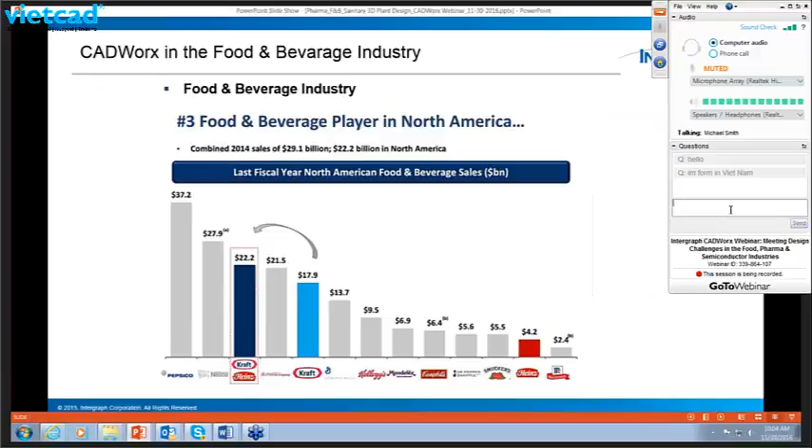But any of the companies that service them are looking for performance advantages. And that's really the message today, is that CADWorx is a performance advantage for any of the consumers of our software and using it in these industries to perform plant design. North American beverage companies, Kraft, some of the others, Nestle, PepsiCo, just some additional graphics to represent their revenues.

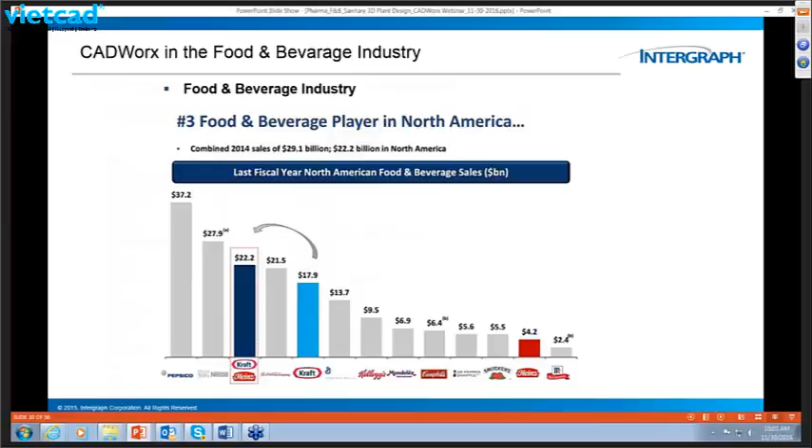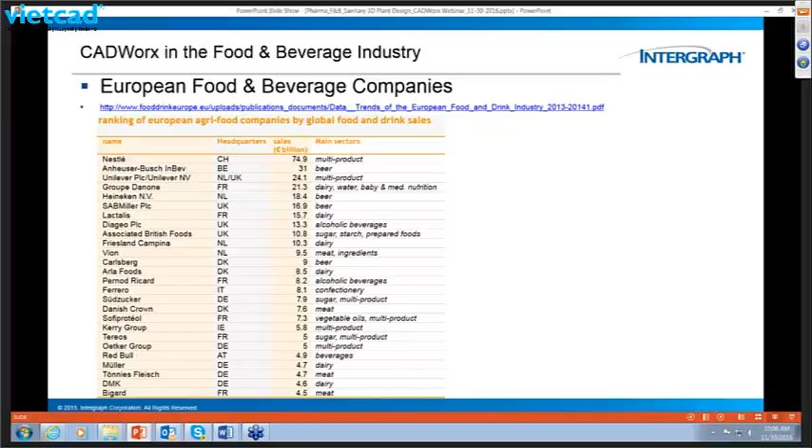Over in Europe, we have a similar scenario. Here again, look at Nestle at the top. Anheuser-Busch. And so this is just for our colleagues in Europe that might be viewing to see that, in the food and beverage industry, we have various companies that are leading in various markets, such as multiple products or beer, dairy, any number of other categories of food and beverage within that industry. Some percentage in terms of increased exports. Same thing for Europe. There's a pretty sizable increase in any one category based upon this kind of data here.

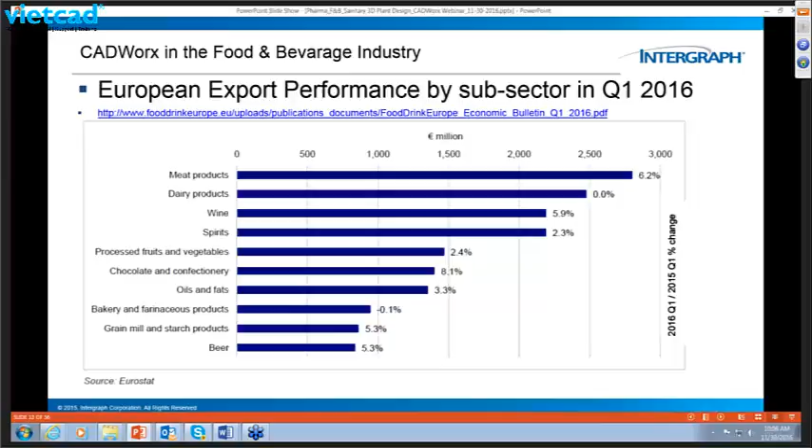With that said, that same plant, the Nestle's brand ice cream plant, is the world's largest ice cream plant. And in that regard, for the dairy industry, it's quite a success story. And one of our clients, the Dennis Group, has been involved with this client for some time. And we thank the Dennis Group for their success and performance with our software since the early days of adopting the sanitary specification.

Another success is with Briggs of Burton in Staffordshire, UK, where they utilize CADWorx for the food and beverage, pharmaceutical, and health and beauty market as well. And as you can see by this quote, they leverage the database, which results in cost savings from fixed prices with their suppliers because they were able to maximize the discounts by ordering in bulk based upon the model. So some really good performance there.

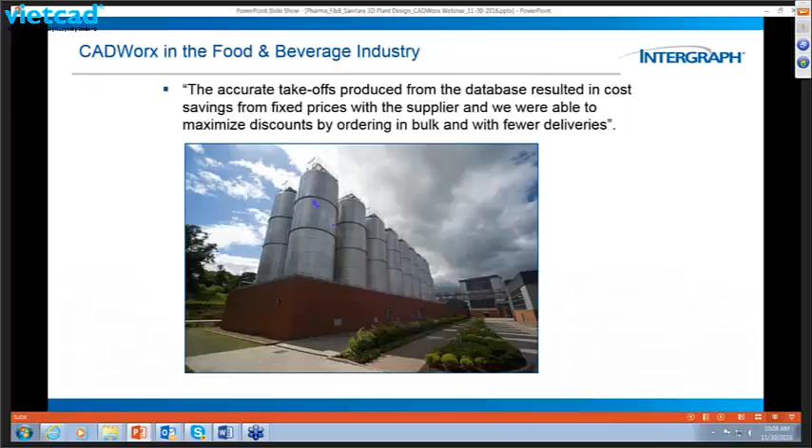Here's another example in the wine industry in California where CADWorx is utilized to develop their 3D models for wineries, and that application of sanitary piping as well.

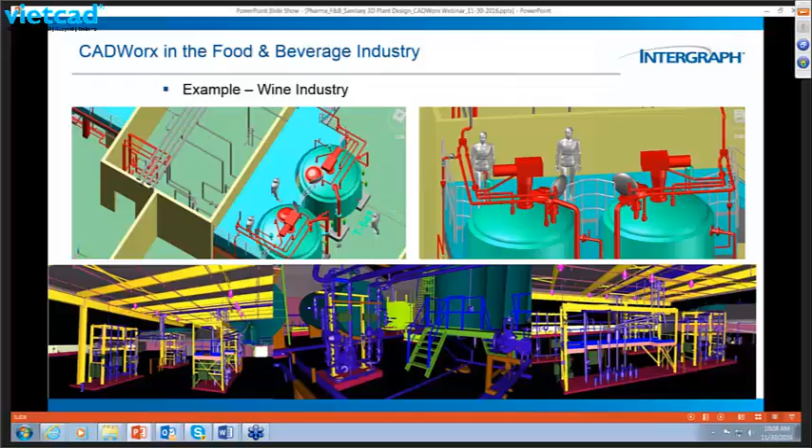So moving on to the pharmaceutical industry as an example, the global pharmaceutical market is worth some $300 billion a year, a figure expected to rise to $400 billion within 3 years. And the 10 largest drug companies control over 1/3 of that market, several with sales over $10 billion a year and profits in the 30% range. But if we look at revenues in this graphic, we see that it's a very lucrative industry, obviously.

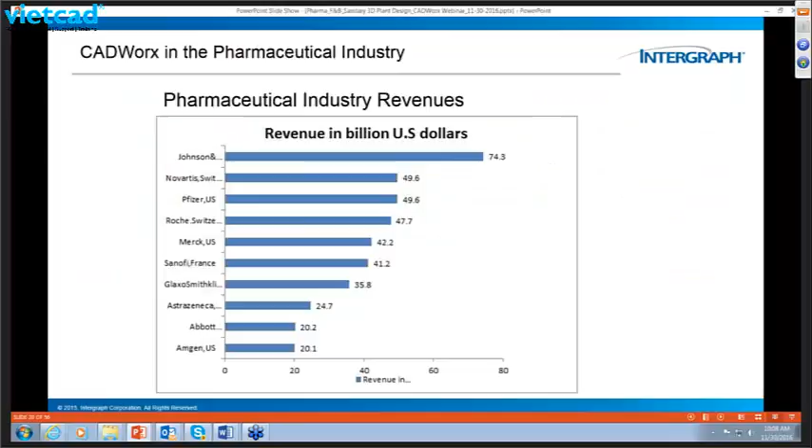So it's a very lucrative, active industry, and I think we all would agree that we have to eat, we need medicine, we have to drink water. So these alternative industries are growing and will continue to grow over time. So they're very prominent and lucrative industries to be involved with.

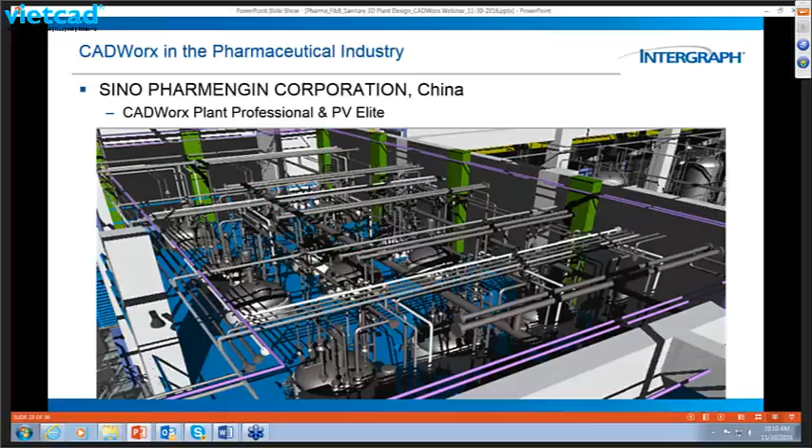Here's an example of CADWorx at work in a pharmaceutical project in China. As you can see, CADWorx was used for the piping and vessels. PV Elite was also involved there as well, and we see some examples of that. So there are some examples of some really great projects. But here again, notice that everything is contained within some kind of building structure.

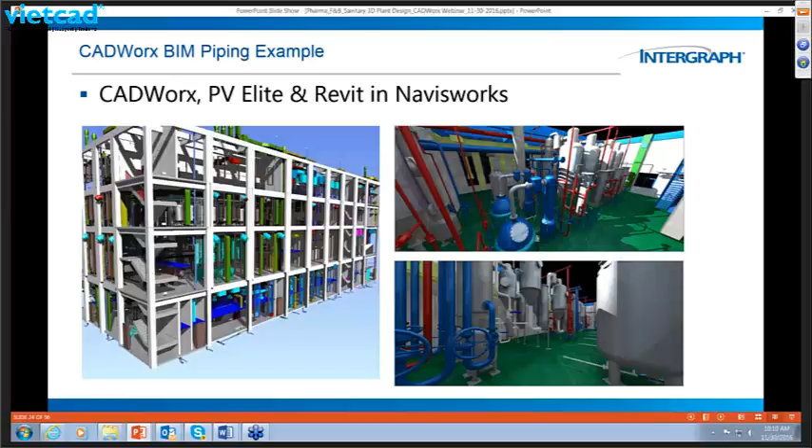Moving on to actually talk about the sanitary plant specification. As we all know, it involves stainless steel tubing and some very unique multi-port valves, as we see here in this image. Know that we understand that the pharmaceutical and food and beverage industries have unique stainless steel piping systems, valves, and vessel requirements, and we deliver software tools to address your industry needs. As we see here, a very unique valve matrix, lots of clamped fittings, and unique vessel representations.

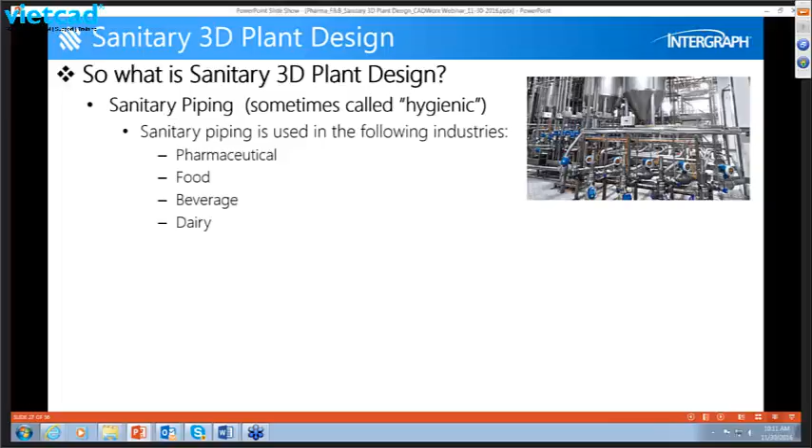As we know, sanitary piping is really utilized in the pharmaceutical, food, beverage, and dairy industries. And as you can see there on the right, a very unique stainless steel environment, very clean environment. Why is that? Well, we have clamped connections which are designed to allow piping systems to be installed easily and then disconnected quickly to modify piping systems between production runs.

Going down the checklist, all process piping and clean in place, or CIP, piping in plants consist of sanitary stainless steel fittings, valves, and pumps, as you see there on the right. Sanitary fittings are polished stainless steel tubing fittings that have to meet certain industry regulations, such as in the case of the U.S., where we have the USDA and the FDA regulations that must be met.

Obviously, there can be no cracks or crevices on surfaces, including the gaskets, that could hold bacteria. We're supporting the 304 and 316L stainless steel, which is required for cleanliness, hence the hygienic reasons. And we support the butt weld and clamp type fittings as well.

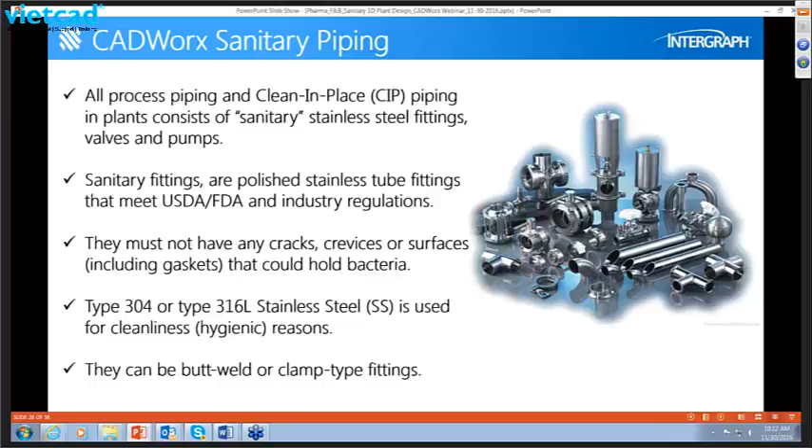A little history. In this case, Jim Lynn was one of the original authors that worked with us to develop a sanitary spec. So I pay some credit to Jim for having helped us. And that history involved Jim looking for something in the sanitary industry back in the late 1990s.

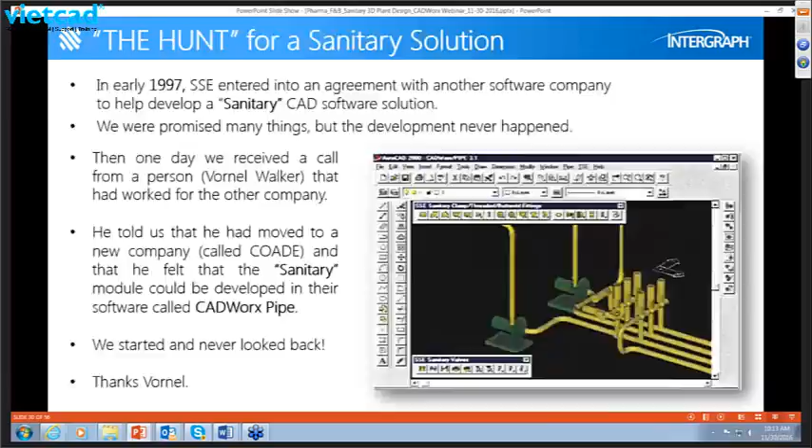And Vornel Walker, who knew him, played a key role in having Jim team up with what we were then called COADE to help develop the sanitary spec. By 1998, that spec had been developed and was working in an AutoCAD environment and supporting the migration from 2D drafting, 2D design to 3D modeling.

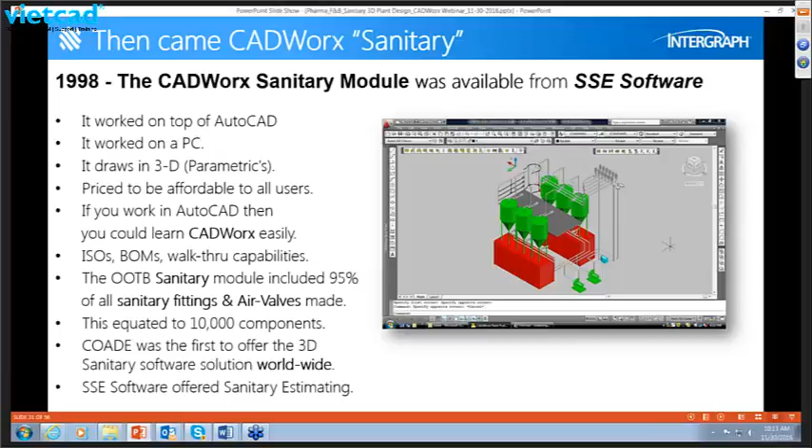So in this case, Intergraph, CADWorx and Analysis Solutions, had led the way some 18 years ago to move forward with the sanitary specification in support of the pharmaceutical and food and beverage industry. With that said, I teamed up with Jim again in 2014 to move that legacy sanitary spec forward, update it, and make it work within our current software capabilities. And that's really what we're here to talk about today.

And with that said, that was published as a content pack for our existing customers and for those of you who may be looking at CADWorx and considering it for your applications of sanitary plant design. We had a content pack published in February of this year.

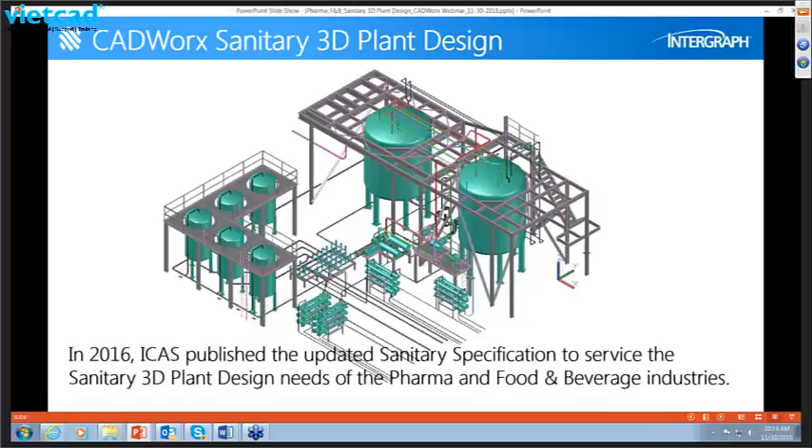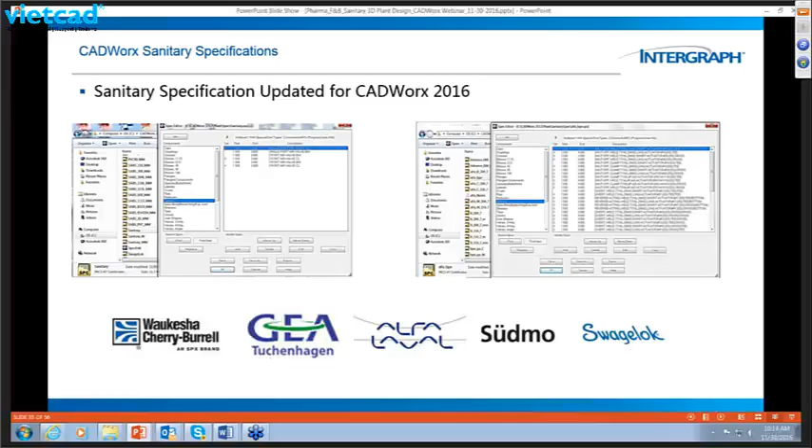Now, that sanitary spec involved migrating a lot of historic data forward into our current software and evaluating various manufacturers of multi-port valves such as Waukesha, Tuchenhagen, Alfa Laval, Sudmo, Swagelok, and currently I am in discussions with ITT. And that specification, when we look at it in the spec editor, as you can see, it contains the necessary long description information to provide you accurate deliverables and bill of materials for purchase purposes or constructability.

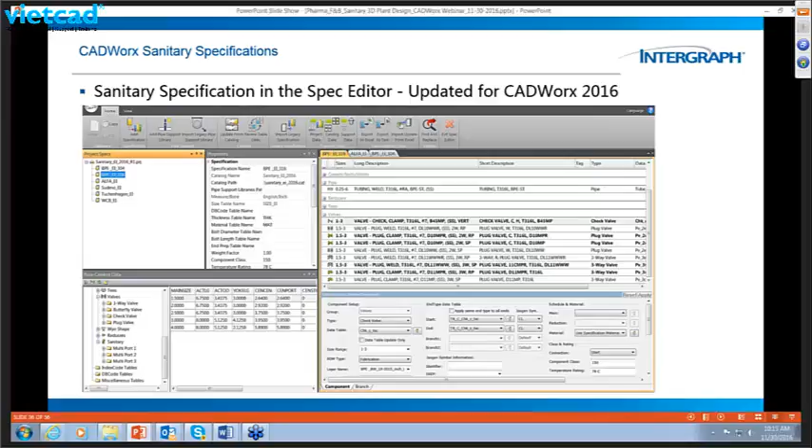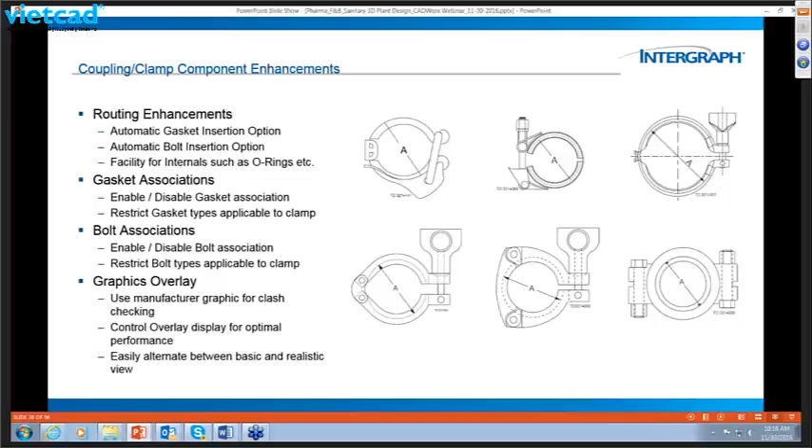And then we have a piping rule that allows you to turn on and off a very accurate 3D representation of the clamped condition, which allows you to control when and if you see this representation, and then this will be shown to assist you in clash detection value as well. The same thing is true with some other clamped conditions.

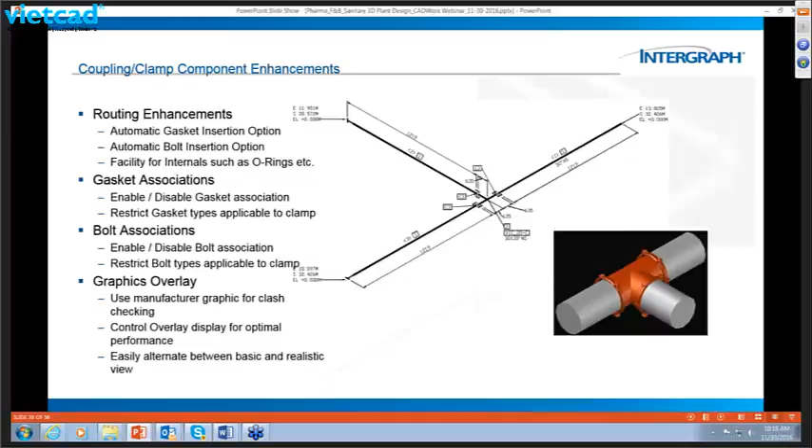In this case, in the Victaulic representation, we have a very accurate representation for grooved piping as well, and here you see an example of the ISO representation for that condition. And then another representation of the triclover or clamped conditions, whatever it may be. The ISOGEN SKEY is representing the appropriate coupling, and if it's a ferrule connection, then the ferrule is also showing up as well.

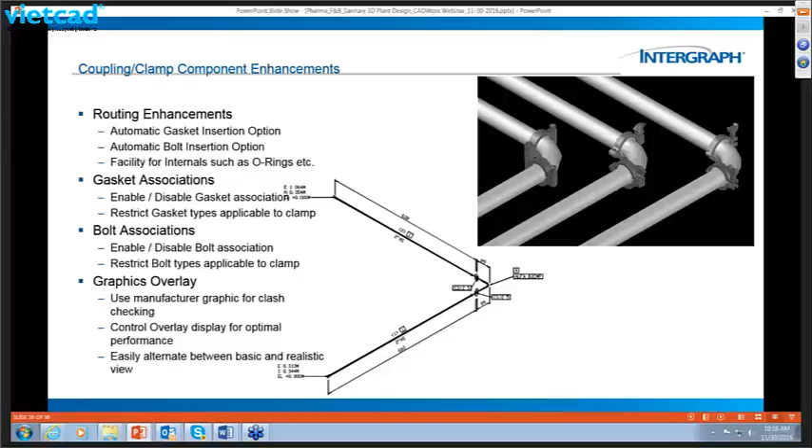So we've moved forward with an improved or enhanced capability clean across the board for these clamped and coupled conditions. And as you can see, the multi-port valves also support all of that representation, which then allows you to, like any other valve, pick on the valve, the plus sign, and begin to auto-route BPE tubing right from the valves.

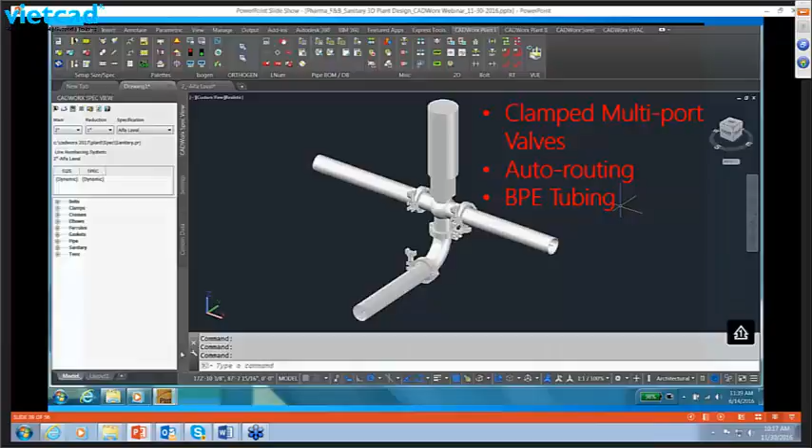Right, so now what I'd like to do is actually show a very brief video, just so you can see this in action, but then we'll go to a live demo in the software that follows. But just to give you a very quick look at how we are auto-routing just like any other CADWorx components. But in this case, it is the sanitary specification, and all of the components are available in the right-click mode as you're accustomed to with the CADWorx products that we sell to the oil and gas industry. We're very excited to share with you today that all of this is working fine for the sanitary spec.

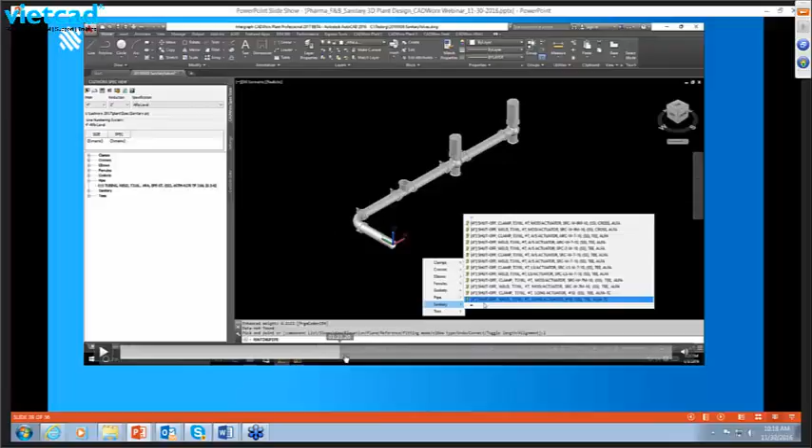And so I'll just progress along. As you can see, we're easily auto-routing with a very productive, intuitive workflow with the spec as it is. I'll move forward in the video to show you again that all of this information is available through the CADWorx component edit dialog. But now let's go to the ISO so you can see that. And we'll see this again live here in just a few minutes when we go to a demo. And so we'll generate some ISOs and take a look at that result.

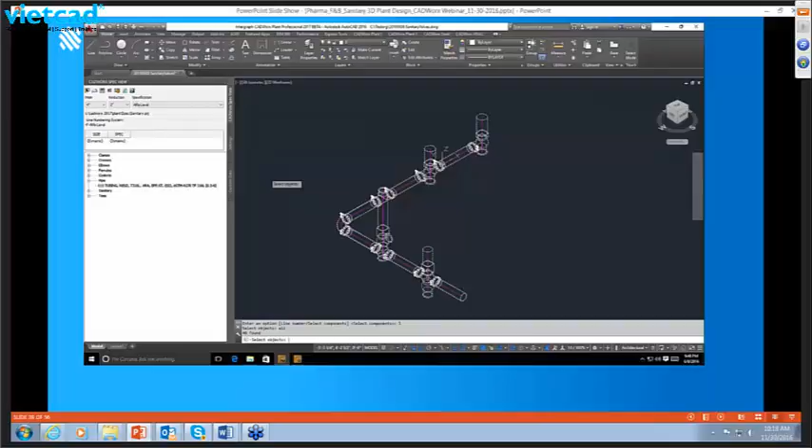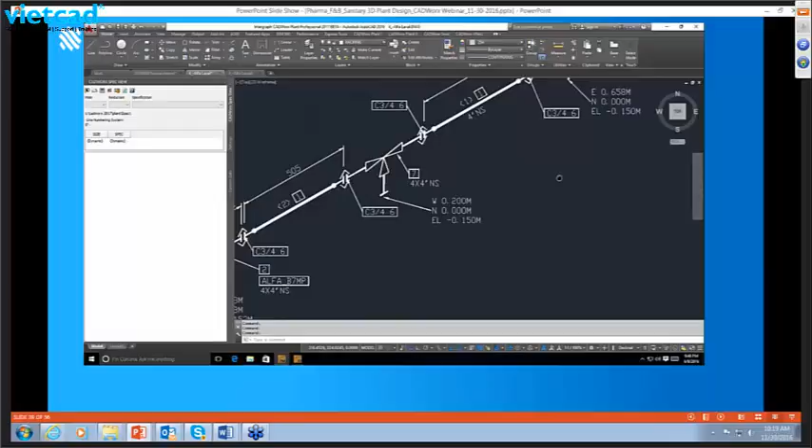Some of these bill of materials spill onto the second page, but now we look at the representation of the multi-port valves, the ferrules, the clamps, all the information that is clearly represented in the ISO now. And of course, the associated bill of material information is called out quite clearly. As you can see, the tri-clamp with the wing nut and the ferrule, etc. All right, so with that said, I'll move on to the next screen, and obviously the clamped and ferrule condition is well represented as we now show here again.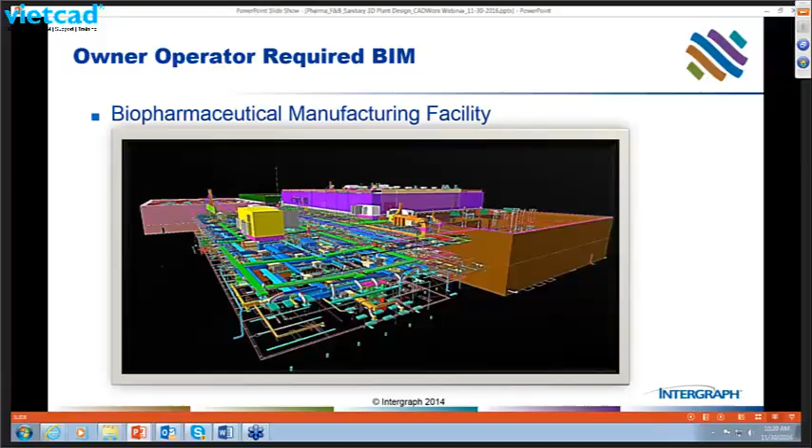Right, so here's another example of what I was talking about earlier, is that obviously this is a plant inside of a building. So this is a representation of a pharmaceutical plant where the owner required BIM, or Building Information Modeling. And this is a good segue to talk about our recent updates to the CADWorx Design Review 2017 software, where we have a new export capability to meet BIM standards and deliverable requirements in those projects. That being that we can create an IFC file. I'll explain that in the next slide.

But this enables you a new level of deliverables, enabling you to comply with project requirements, satisfy owner requirements for BIM implementation. This improves your collaboration with other stakeholders by sharing the data. It passes data-rich content, and that in turn serves downstream needs of facilities, operations, and maintenance.

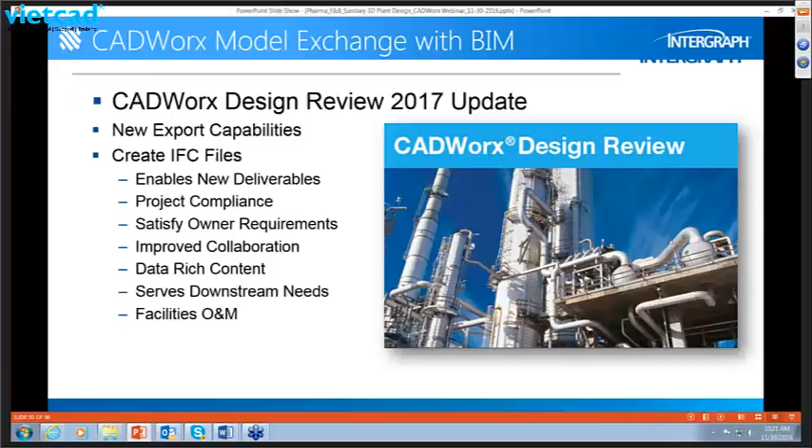What we are talking about is the fact that most of these projects have some kind of architectural software creating the 3D building. That might be Revit, that might be Graphisoft ArchiCAD, or some other product. But the whole requirement for interoperability is paramount in meeting BIM standards, and those BIM data exchange standards require a specific data exchange format, that being an IFC file.

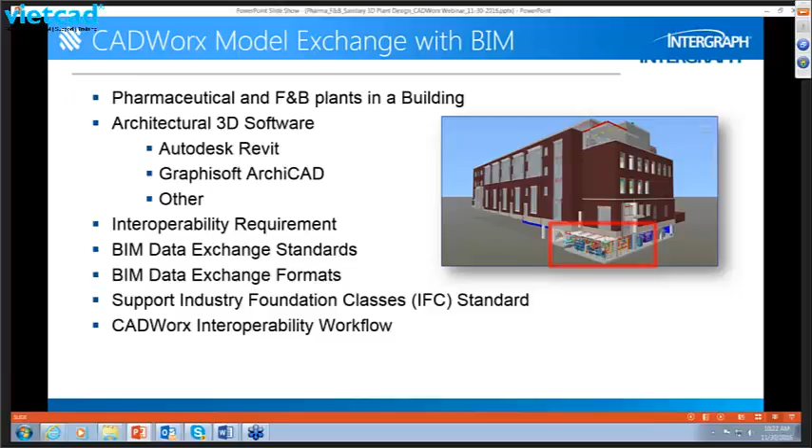That standard for Industry Foundation Classes is something we're very excited to share with you that is new in CADWorx Design Review and enables you to meet those BIM deliverables of IFC files and exchange your data with other stakeholders such as Revit users. So what does that interoperability workflow look like? It's very straightforward. Take your CADWorx 3D piping model, open it up in CADWorx Design Review, and export the necessary IFC file. That in turn can be read by Revit.

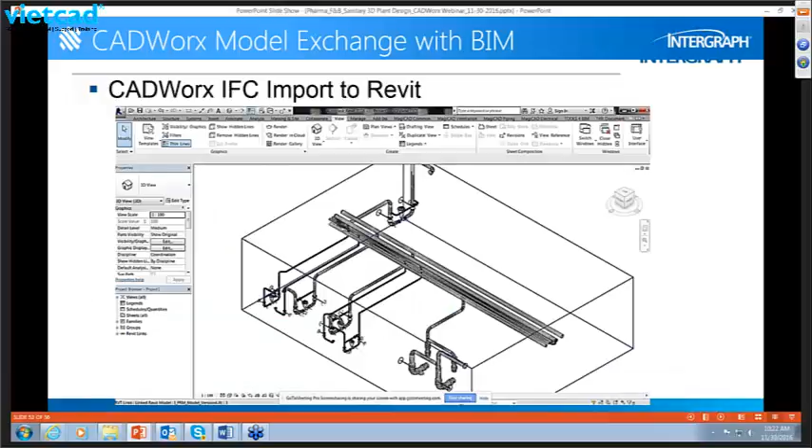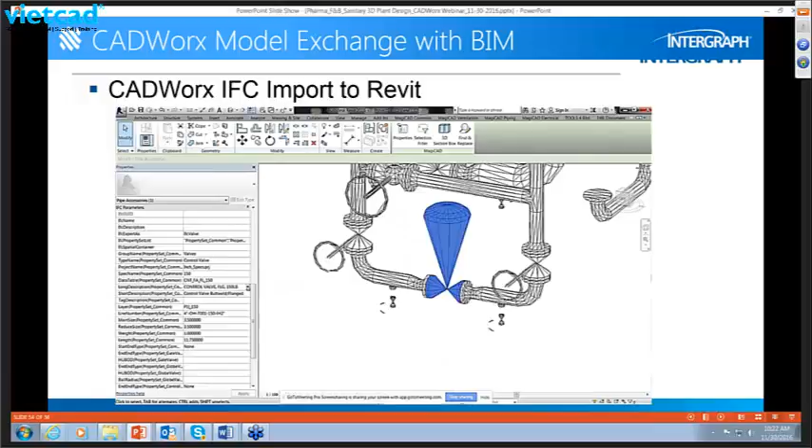An import of the IFC file brings the CADWorx 3D piping model directly into a Revit building. And in turn, the intelligence has been passed through. The data-rich content of our CADWorx model is now present and visible. And so you've been able to share your 3D CADWorx model inside of a Revit building model.

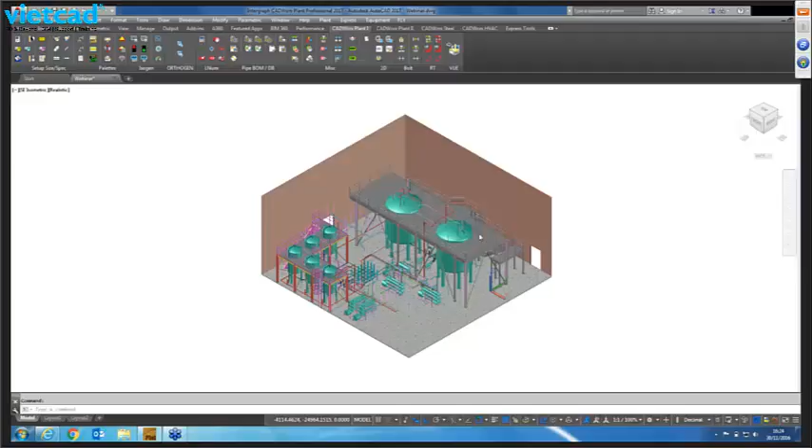Okay, on the screen we have an example of a CADWorx model of a part of a pharmaceutical plant. So if I zoom in slightly, let me see a little better. So I'm just going to unload a little bit of this model here just so we can see what I'm about to demonstrate. Let's just jump round.

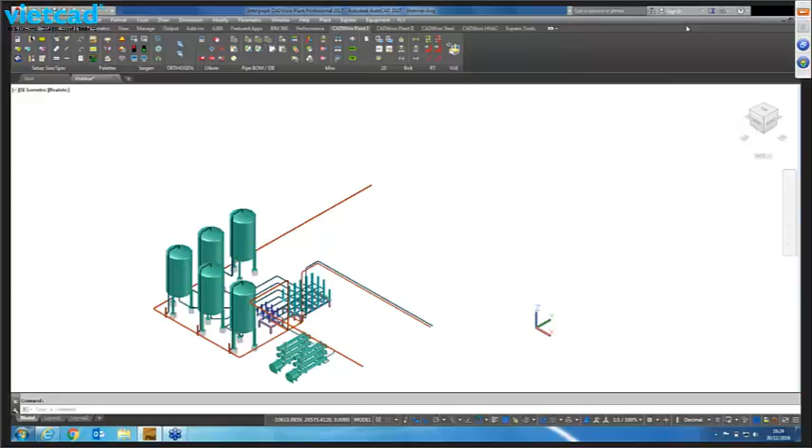So if I open up the specification editor, we can see the standard specification that Michael referred to earlier on. And so this is our standard BPE, or BPE for you guys. And also within here we have various valve specifications as well. So I'm going to zoom in down here and let's start routing with this tubing and various components. So let's pull away from this ferrule here.

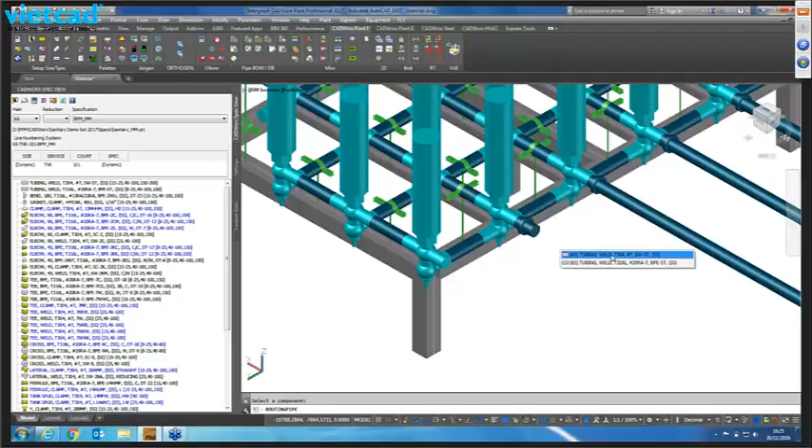So use the exact same line number, and we see we have the two tubing options that we have within our spec. So I'm going to come out 2 meters, and then I'm going to use the auto routing to connect to the nozzle on the bottom of this CIP tank.

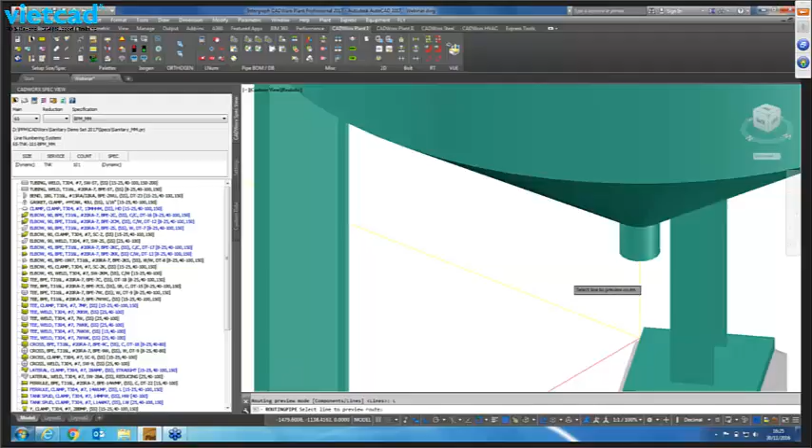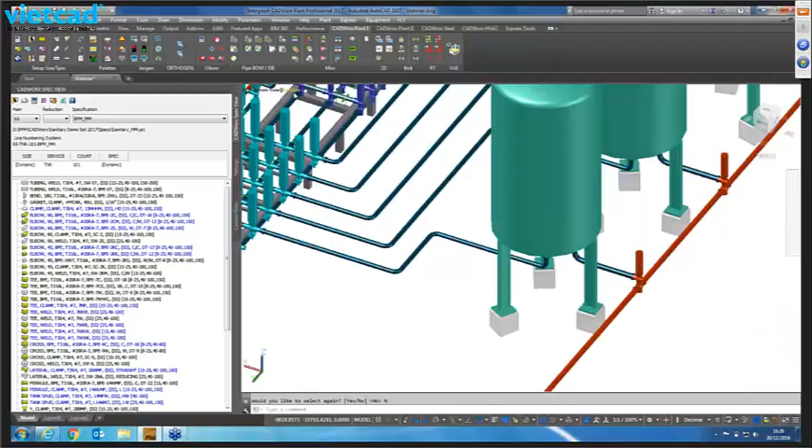So we get our 2 routing options. So I'm going to use the yellow route, and we have the option to add a fastener component to the nozzle. So I'm going to select a clamp, and we should see the clamp there, and also then a ferrule. I'm going to choose that line, and now I'm just going to jump to 2D wireframe, and let's have a quick look at that nozzle.

So we can see that we have placed the gasket, ferrule and clamp all associated with that connection. Same at this end here as well. So if I just hover over each of the components, we can see the long description that Michael referred to earlier on, which contains the type of the steel material. Also, we'll notice that it contains the polish as well, which is quite important in this industry and this specification. And that happens to be on all the components.

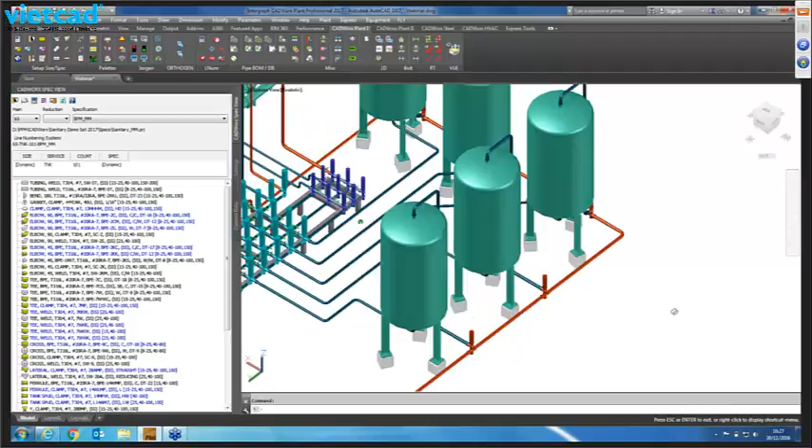So we have the same for the clamp, and then let's be a little bit tricky here, but see if I can grab the gasket. Yep, and the gasket too. So let's go back to our realistic mode. And then let's come around and look at this CIP line that runs behind these tanks at the back here. Now we can see we already have some multi-port valves already placed on the line, so let's add another. So let's switch, and I'll use the Alfa valve specs.

And as we can see, we have quite an extensive specification here. So lots of different types of valves. I'm going to grab this one from our spec. And as we can see, we've grabbed our valve, and just before I place it, as we're all aware, we use piping rules within CADWorx to help automate and make placing components and routing a lot easier and more efficient, and that's exactly what I'm going to do here. I'm going to fully utilize them.

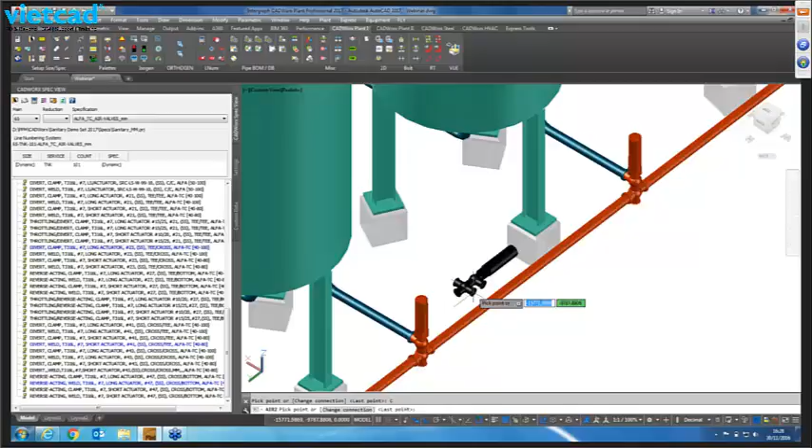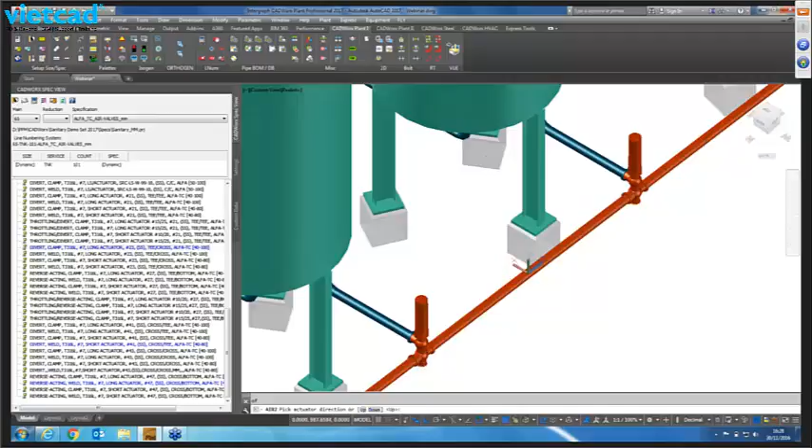So before I insert it, we can see that we can cycle through all the various connection points on each of the ports of this valve. So that's the one I want, and let's place it on this line. Like any other inline item, I can move it along the line. I can also change the justification. So there we have it, it's to the middle of the valve, and we're going to place it in the middle of this pipe. And then I get the option of which direction I want the top port to face, and we'll place it there.

So I'm going to keep the specification because the line we're currently on is the BPM, but the valve is on a slightly different specification, so I'll keep that. And here we have the rules coming into play. So it recognises that it's a ferrule connected clamp pipe. So we'll select ferrule, and I see I made a mistake. Let's place it on. Nice, okay, yep. I thought I'd left it the wrong size, but again I've got my rules set up so that it doesn't matter, it's changed the size. So I'm just going to close that down for now.

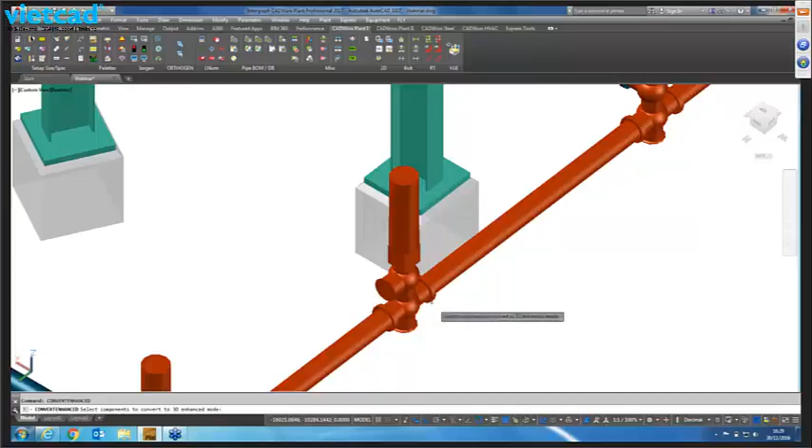And we notice we have just plain clamps, and earlier in Michael's pictures we saw we have a graphics overlay for these clamps. So if I run a command, we can see those very same clamps here. So they are all set within your specification. So if I open up the spec editor, we can see our spec available here, and look at the couplings, which is the clamp here. Look at the data table in the catalog, and we can see the directory where the DWGs are saved, and also the DWG itself. So each one is assigned to a particular size clamp.

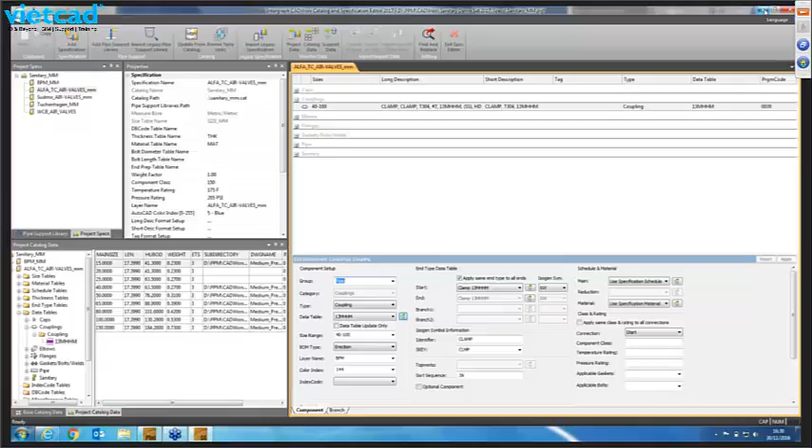That's right, Matt, and obviously this really enhances the accuracy of the representation. Granted, you would turn these on and off on a selective basis, maybe for a presentation, but the key here, the value that it brings, I think, is the next part you're going to show, and that's clash detection, right? Yes, exactly.

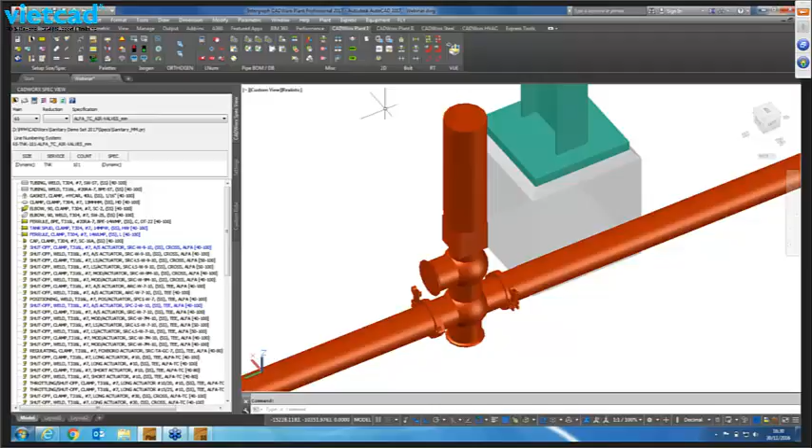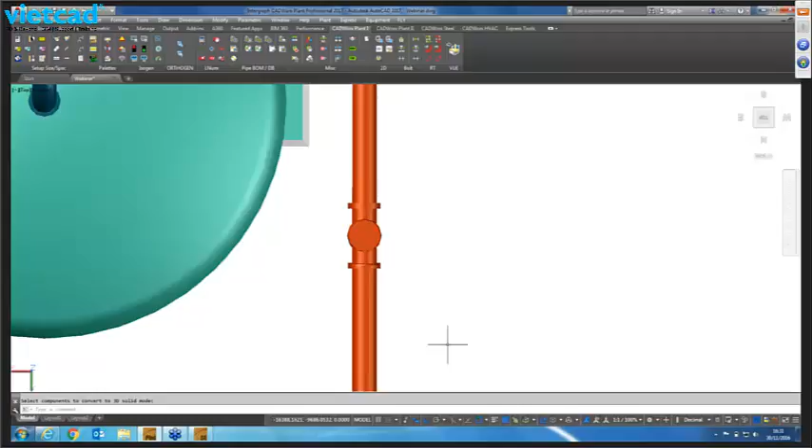So I'm going to switch to a top view to show this a little better. I'm just going to change those back to the visual style that we saw before. I'm going to copy this line and just move it over slightly. That should be enough. So we can see at the moment nothing's clashing in this view. There's a bit of a gap between the clamps and the valves as well. In fact, the valves are pointed the wrong way, so once they're in place they can always be moved. So I'm facing that way.

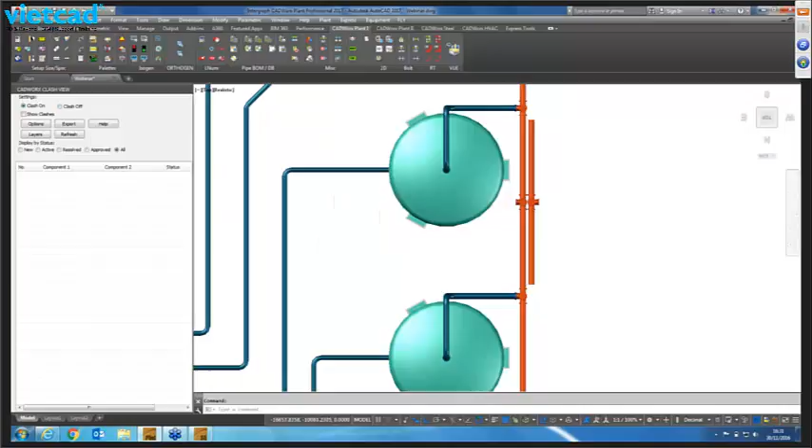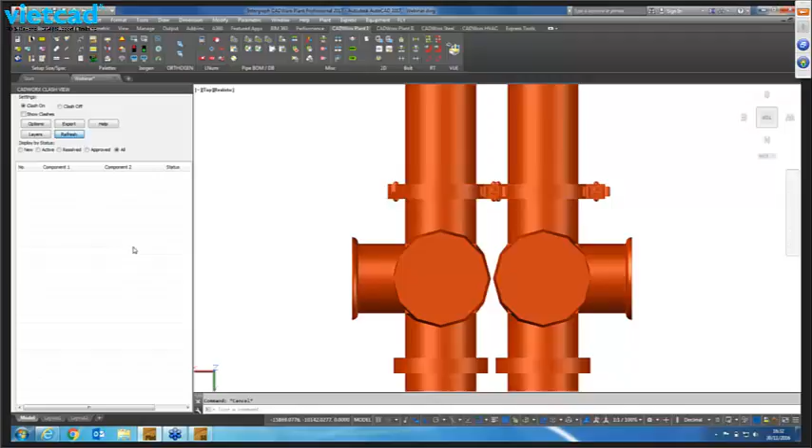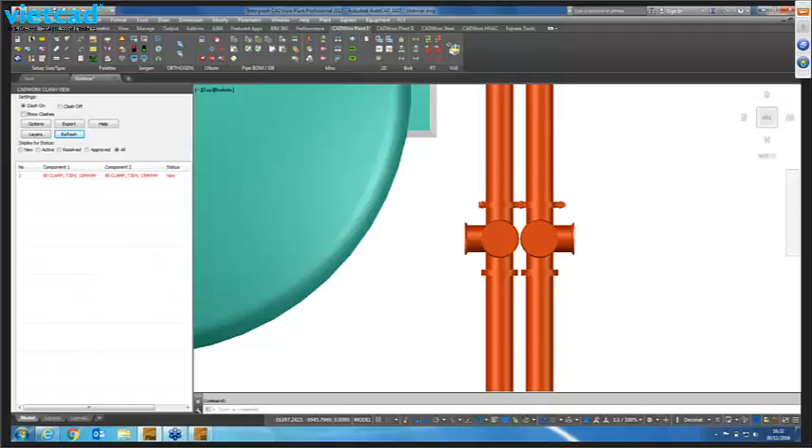And now let's turn our clash detection on, just to show that there's definitely no clashes there. Nothing's coming up in a list, everything's happy. But we know that the clamps are much bigger than what they're currently being represented, so let's show those clamps again. And we can see there's definitely going to be a clash there between those two. So if I refresh my palette, we should see this clash show up in the list here, which it has. So, as Michael alluded to just a few moments ago, this overlay really helps with clash detection and increased accuracy. So let's move this aside.

Clash is now gone, issue resolved. We also saw in that video, we can pull away from the valve. And once we finish routing, again, CADWorx picks up that it's a clamped connection, so we add the relevant ferrule, and it's added the clamp and the gasket as well.

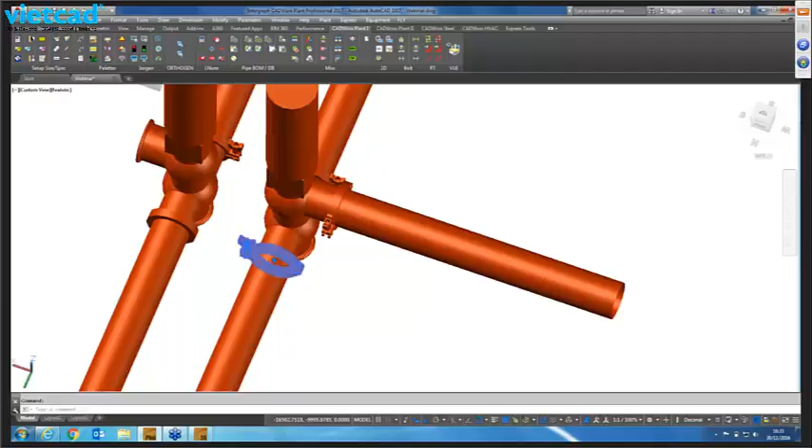So let's see all the clamps on here. I'm just going to rotate this one. So then it's in a position that's much easier to place and service, in case this valve needs to be taken apart or replaced.

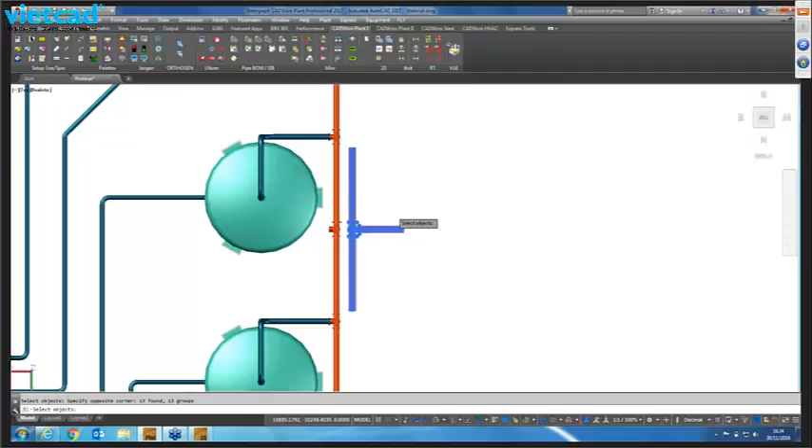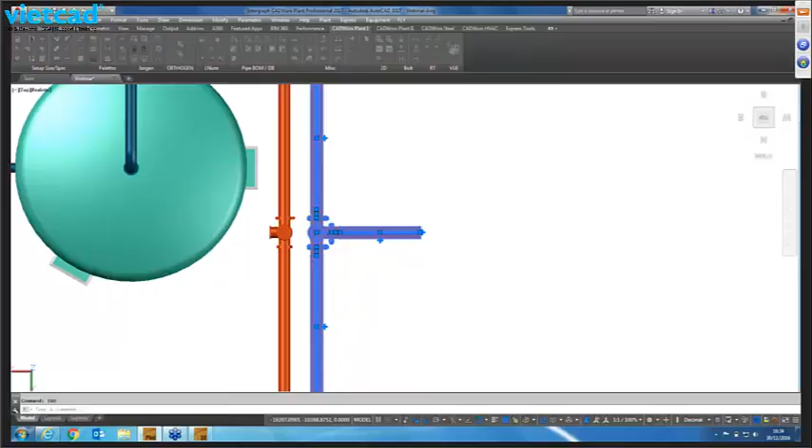So next thing to see is how this is represented on an ISO. So let's run Isogen on that line we just created. Let's see if it'll run this time. Let's try running this bit of pipe instead. Yes, there we go.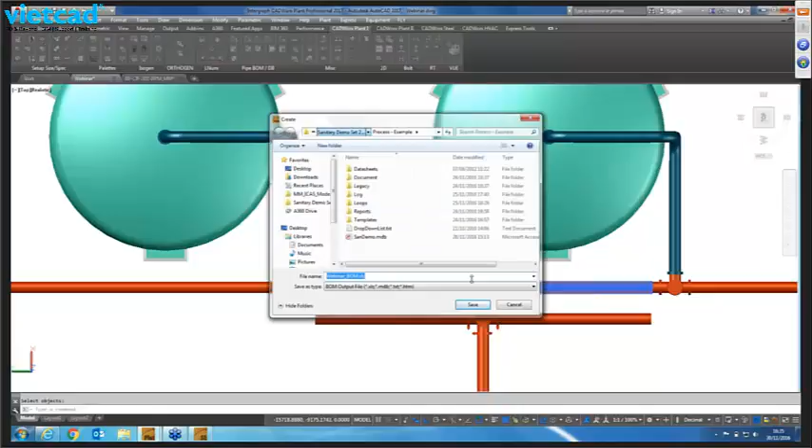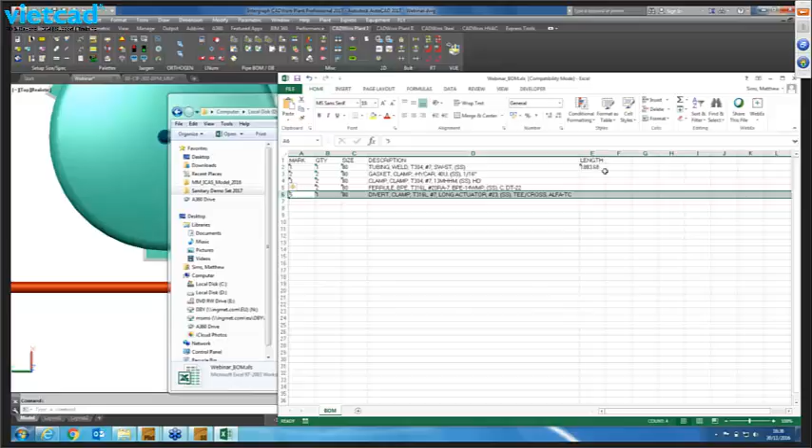Let's quickly export a bill of materials to show that as well. Here we can see exactly the same list. So we have our valve, we have our 2 ferrules, 2 clamps, 2 gaskets, and also roughly 1.9 meters of tubing as well.

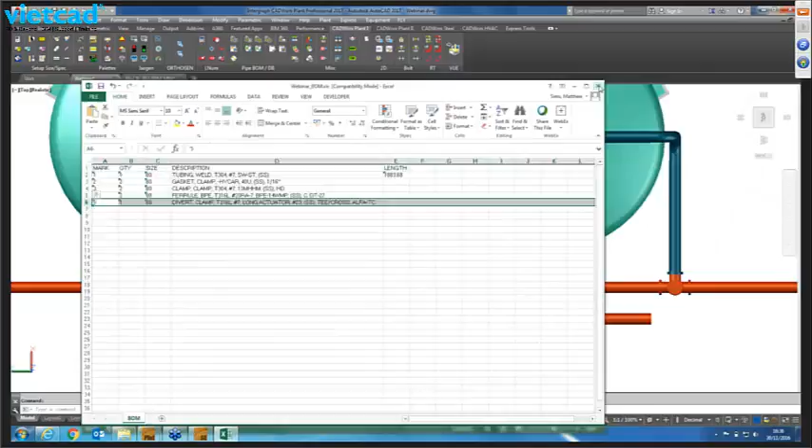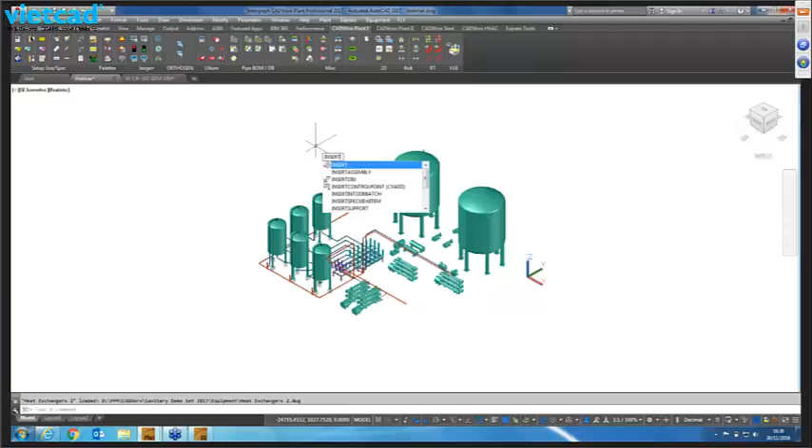So the next thing that we want to show you is routing sloped pipe. So to do that, I'm just going to bring in some more equipment and some more piping. So let's just attach that drawing and insert some more piping. So we see we have some piping already started at the top here for this vessel. I'm going to route from there down and finish on this pump here.

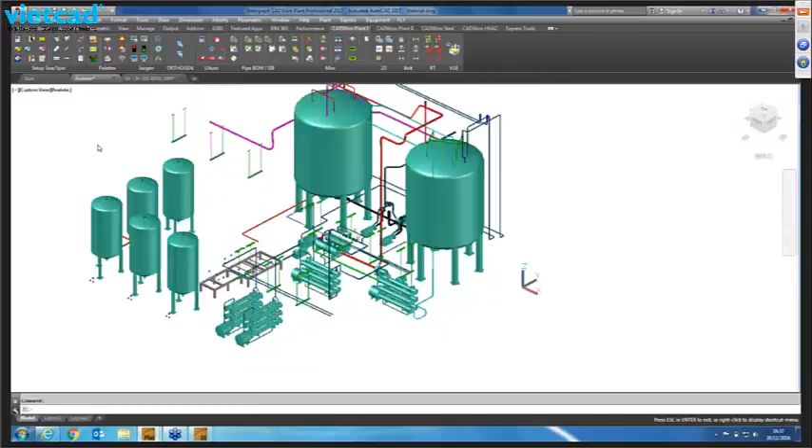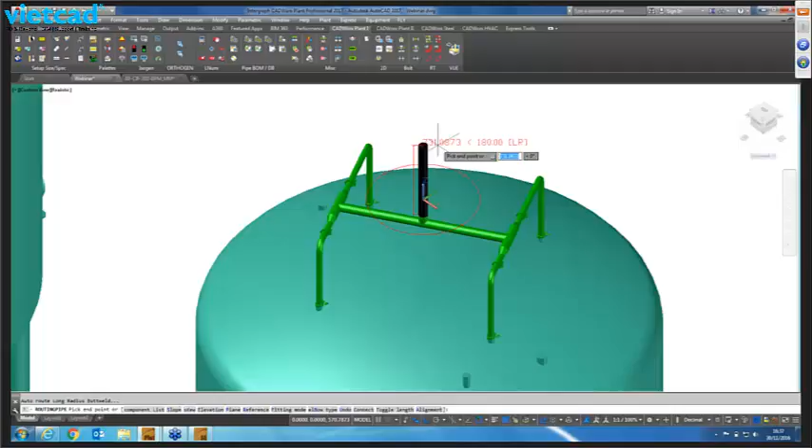But we need this tubing to be sloped. So what I'm going to do is use our line view palette just to isolate that line and the equipment. So let's use a plus grip and pull away. Select the tubing that we want. So I'm going to come up 450 mil and then select the elbow that I want to use from the specification.

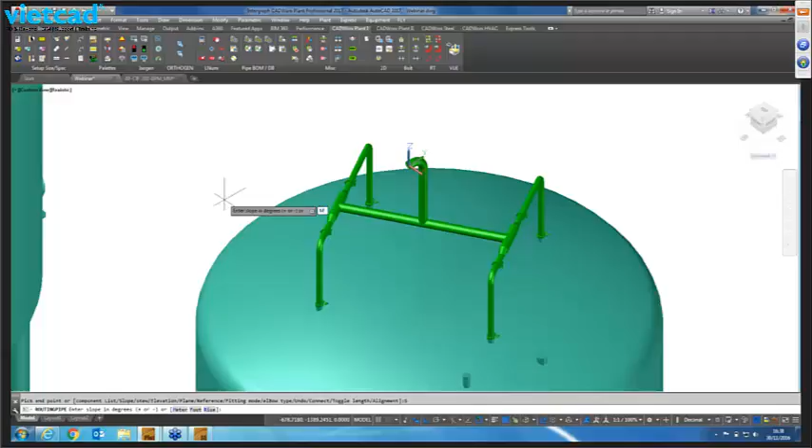And now this is where I want to start my slope piping. So I'm going to use S, or I could pick from the bottom on the command line to start the slope piping. It wants to rise per meter, and I want to run 10 mil per meter. So first part needs to be 400 mil long, then 7 meters, 1.3 meters, and then 6.5 meters down. And let's just quickly switch views, and we can see that we are sloping in both directions.

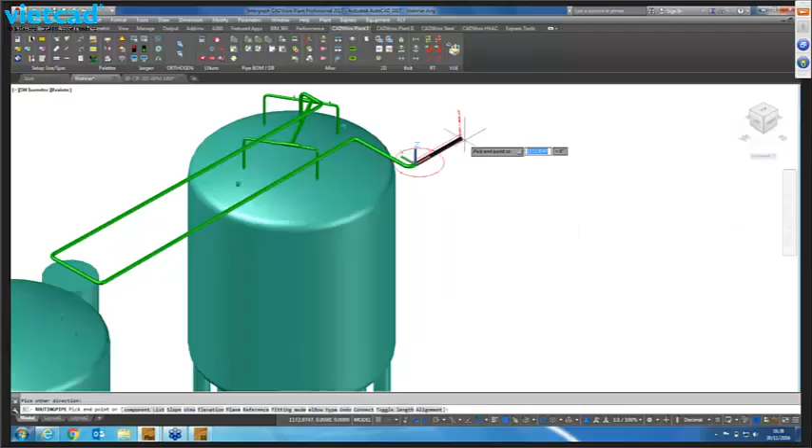So let's finish this off. That's going to be the end of my slope piping, so I'm just going to press enter again to come out of the slope command. And again, I'm going to pick an elbow from my list. And then I'm going to use the auto routing capability of CADWorx to finish off onto the pump, just as we did before. So I'm going to choose the red line, and again we have the option of adding a fastener component, so I'll add a clamp and then a ferrule. So you can see it's finished off with the same

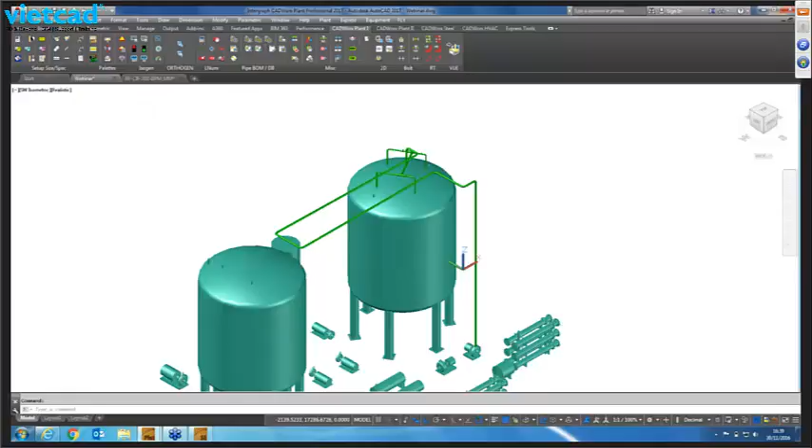connections as before. So we'll produce an isometric of this, and just before I do, it's quite a long line, so I'm just going to add a stop sign of where I'd like to break the line, and then we're going to run an isometric. And before I run the style, I'm going to quickly jump in to iConfigure and make one change to my style.

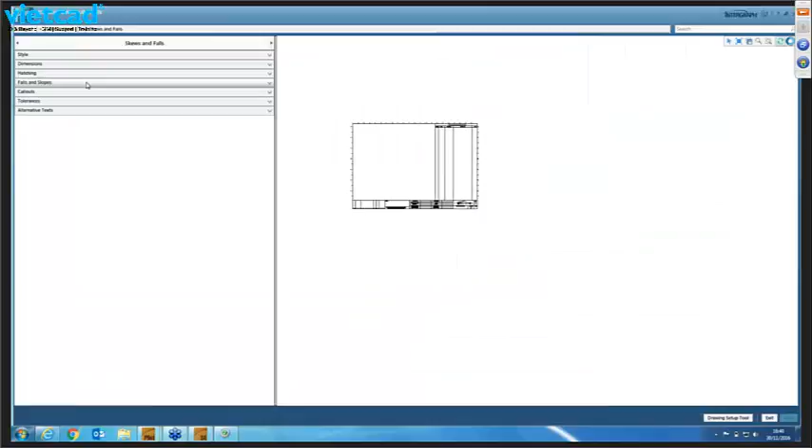So you can see we have under dimensions, skews and falls. Let's maximize our window. And you can see we have quite a wide range of ways of displaying the falls on our isometrics. So I'm going to choose the ratio, save, exit, let's come out of here and run Isogen.

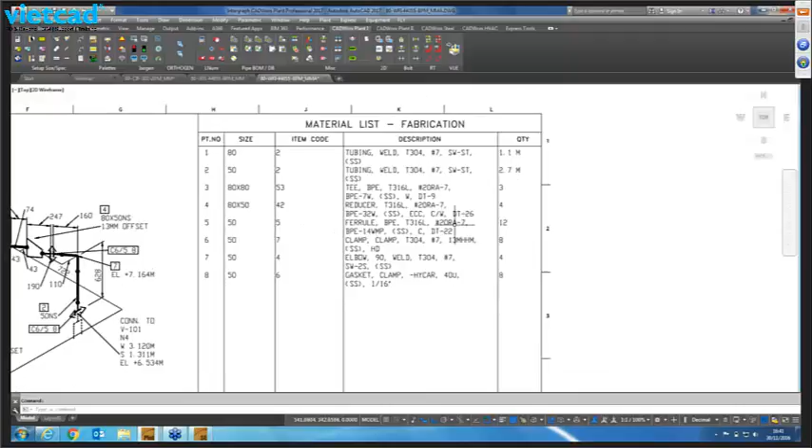Produce two files. As we see from before, we have our clamp connections, also clamp connections on our nozzle, and you see it's calling out the nozzle and also the vessel it's attached to. Again, the same accurate material list, and then let's look at the other file it's produced.

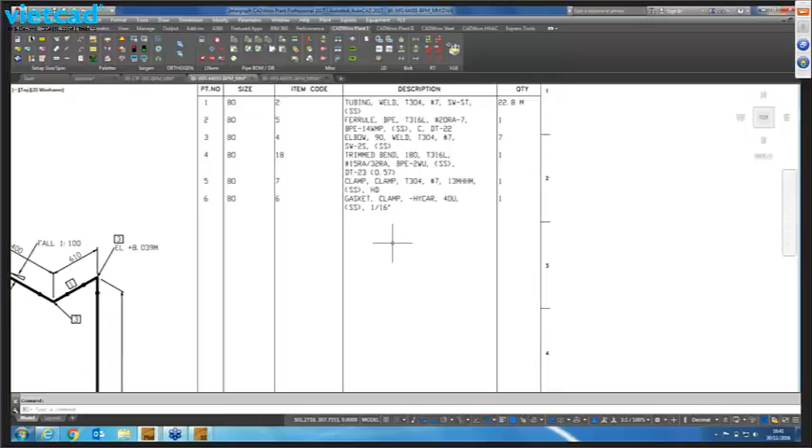Here we can see our falls are all shown 1 in 100, and we also have the connection onto the discharge nozzle on the pump at the bottom. And again, our same accurate material list. And that is all.

Brilliant. Wonderful job. Good job there, Matt. So I think we've covered some of the highlights here with regards to our limited time.